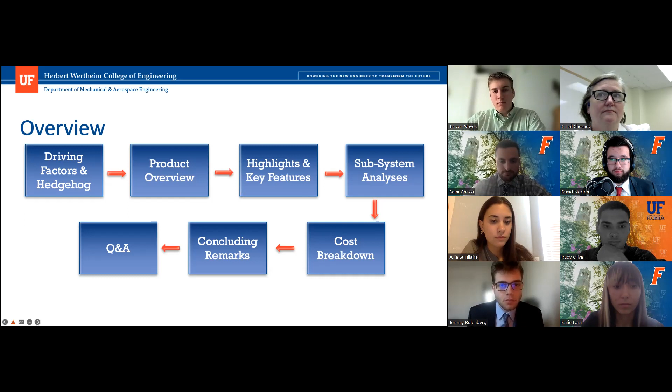One of the first steps that the HelioGEAR team took to converge on a final conceptual design was developing a hedgehog concept. To do this, we had to examine 3 important questions: firstly, what our team was best at; secondly, what our team was passionate about; and thirdly, what drove our economic engine.

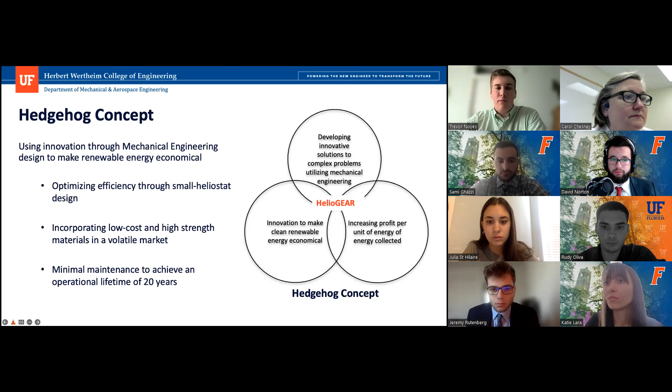After some careful deliberation, we determined that our team was best at combining our mechanical engineering skill sets to solve complex problems using innovative solutions within the field of mechanical engineering. Secondly, we determined that our passion lies within using the innovative solutions we developed to make clean, renewable energy economical.

Finally, we needed to figure out how to make what we were good at and passionate about unique and profitable for our customer. Our goal was to increase the profit margin per unit of energy collected by our heliostat module. To accomplish this, we aimed for a strong, low-cost design that had minimal tracking error to reflect more of the collected light onto the receiving target.

With the ever-changing status of the world market, it allowed us the ability to utilize unconventional, low-cost, and high-strength materials to keep the overall module cost down. To further increase the efficiency of the design, the HelioGEAR team aimed to create a design that required minimal maintenance for the full 20-year service lifespan of the module. Conceptualizing these thoughts in a diagram, we find the HelioGEAR module right at the very center.

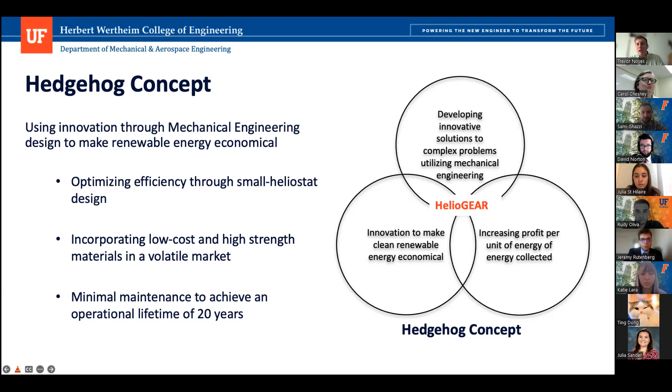Lastly, the electronics will be composed of an ESP32 chip for Wi-Fi and Bluetooth connection, while also looking at having a limit switch that will be attached to the PVC pipe to alert the system when the mirror is not at its home position.

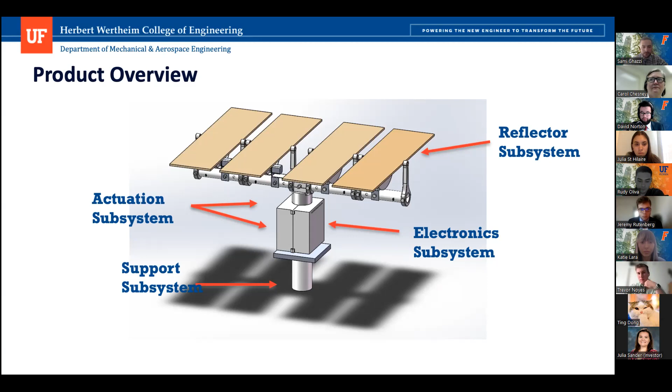Next, based off of the product overview, some of the highlights and key features taken away were the PVC support system, the geared actuation mechanism, and utilizing the mylar for the coated surface on the mirrors. The PVC support allows us to achieve a very lightweight, rigid, and long-lasting structure for a minimal cost.

Moving on to the geared actuation mechanism: utilizing gear sets that are very specific to our concept allows for extremely precise tracking of the sun and results in minimal loss of reflected sunlight. And finally, the Mylar film coated surface creates a much stronger, more durable mirror for even less cost than one would think for a conventional glass mirror.

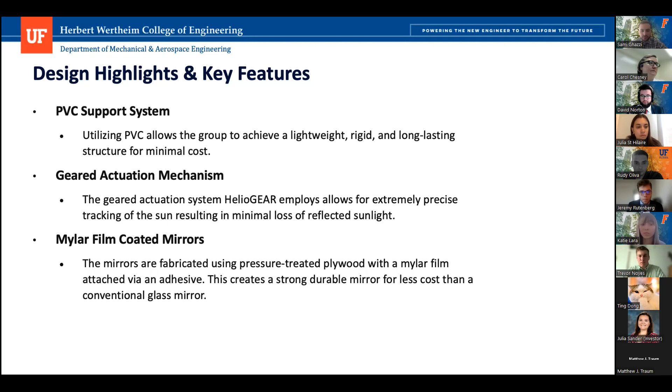And now we'll take a look at the actuation subsystem. I'd like to wish our guests a warm welcome. Good morning, so this is our actuation system.

So we have 5 individual motors that will be controlling our system in 2 dimensions. We have a large azimuthal motor that has 17 foot-pounds of torque, and 4 vertical stepper motors, each with 0.35 pounds of torque.

In order to control the surfaces, we're using different geared systems. The azimuthal motor is very high in torque and uses a relatively smaller gear than the vertical motors, because as we'll see in a moment, the vertical motors use very large ring gears, and the azimuthal motor, because of geometric constraints, uses a slightly smaller ring gear. So the azimuthal control is done with a single motor, and this is energy efficient and allows all 4 mirrors to rotate in the horizontal plane at once.

Each mirror can be rotated in the vertical dimension on its own. If we could see the next slide, please.

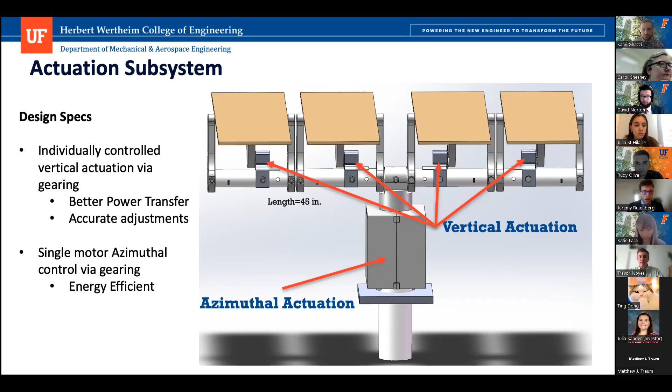Now, as you probably noticed from the last slide, it is a bit T-shaped, so that requires a lot of torque to be able to rotate the entire system at once. Next slide, please.

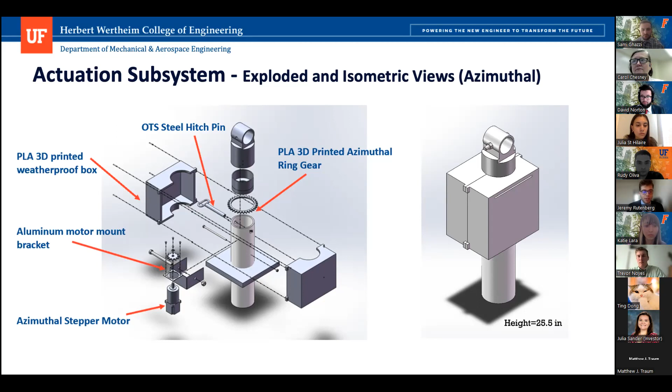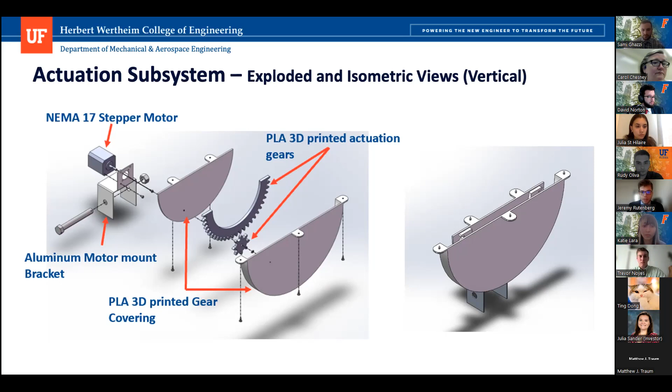The 4 major customer needs for the actuation subsystem were found to be: first, each module needs to mitigate optical losses due to tracking errors not to exceed 40%. With our geared actuation design, we are able to control very precise movements of the heliostat, so we have 0 tracking error.

Next, the heliostat must be capable of tracking the sun throughout the day. In order to do so, there needs to be at least 2 degrees of freedom, and thus in our concept, HelioGEAR rotates both azimuthally and vertically to get those 2 degrees of freedom.

Next, capable of redirecting sunlight to a central tower up to 100 meters tall. We found that the vertical rotational movement must be greater than at least 90 degrees, and with our design we have a vertical rotation movement of a minimum 180 degrees.

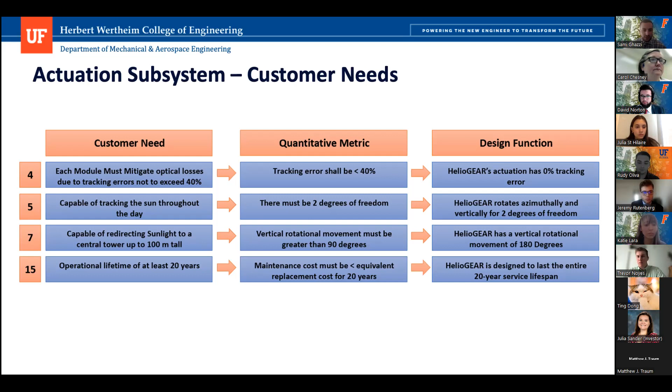Next, the operational lifetime of at least 20 years. Our design is designed to last the entire 20-year service lifespan while looking at all of the factors of use in Las Vegas, Nevada under certain extreme conditions.

Furthermore, we have some critical analyses of the actuation subsystem. On the left, we have tracking error, and obviously tracking error is a very important aspect of this design. Initially we looked at many different factors that would go into tracking error and specifics to Las Vegas, Nevada.

We look at some boundary conditions, such as where will the sun be in the most extreme cases, such as early in the morning, late in the evening, and during the winter solstice. That was when we determined the sun would be lowest during operating conditions. For this analysis, we assumed the sun would be moving 180 degrees across the sky over 12 hours for simplicity and general accuracy, yielding an angular rate of 0.25 degrees per minute.

Using that, we can plot the optical gain against the angle of incidence between the sun and the actuator. The optical gain of the system is 50%, and the optical losses due to tracking are 50%. This doesn't meet the threshold the customer requires of 40%.

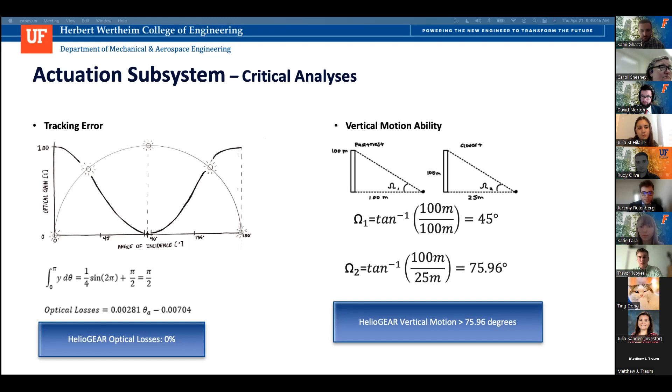Initially, we designed this backing to be made out of injection molded ABS plastic, but with a cost of nearly $300 per module, this was ruled out as being far too expensive. The mylar film will be attached to the wooden support through the use of a spray adhesive.

The mirrors are actuated by stepper motors connected through a gear track at a reduction ratio of 6.5 to 1. This really tall gear ratio allows for the tracking to be very accurate. For each step of the motors, the mirrors actually only shift 0.3 of a degree.

Initially, the gears were going to be exposed and machined out of aluminum. However, through several design changes and attempts to save costs, the gears were changed to be 3D printed out of PLA. As a result, it became a concern that sand and other debris could become trapped in between the gear teeth and over time wear down the plastic and cause the gear system to become loose, reducing the accuracy of the tracking. To fix this potential problem, gear covers, also 3D printed out of PLA, were designed to fit snugly over the gears to minimize the sand and other debris that gets in between the gear and the gear tracks.

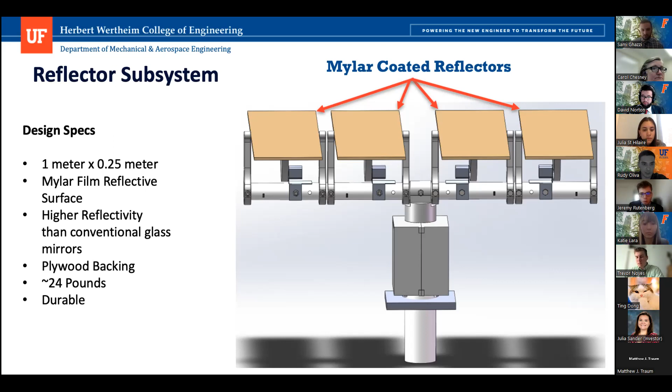On the next slide. So this next slide shows how the subsystem is assembled. The gear track is aligned with the longitudinal axis of the wooden mirror support, and it's fixed in place so that it's concentric with the axis of rotation of the mirror support.

While the hinge rods do not rigidly attach to the wooden support, they are fixed in place on the crossbar and keep the mirror in place from sliding off of the ends of it. After the heliostat has been fully assembled with the elevation motors in place, the gear covers are added by aligning them with the gears and using self-tappers to fix them to the mirror support.

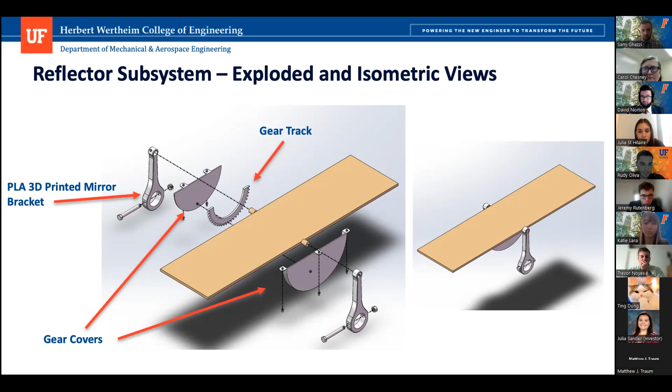This next slide is in regards to HelioGEAR's reflector subsystem customer needs. Based on the customer needs statement that we received from the proposal, we determined that many of the customer needs did in fact relate to the reflector subsystem, making it one of the most important subsystems.

Beginning at the top, customer need 1 asked us to address innovation by small heliostat size. This was a metric that was hard to define quantitatively. However, the way we chose to do it was by essentially taking the highest average from the combined module cost, shading, and focal inputs from our conceptual designs. We combined all of those together to create the best functional design to allow the heliostat to be innovative by small size. Secondly, the total reflector collection area had to be equal to or less than 1 square meter.

HelioGEAR is able to fulfill this design need by utilizing a mirror system that has 4 quarter-square-meter mirrors to add up to a total of 1 square meter of reflective surface area. Third, each module needed to be composed of 4 to 16 heliostats. Our final reflector subsystem utilizes exactly 4 individually controlled heliostats.

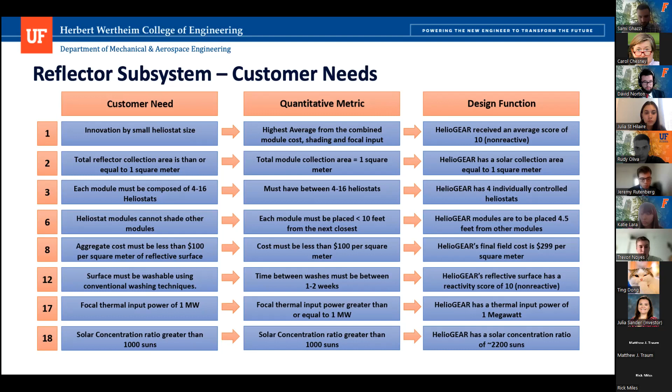Explaining this further, the customer needs statement called for a heliostat module to be presented that was able to deliver at least 1 megawatt of thermal input power and have a concentration ratio greater than 1,000 suns. The HelioGEAR module is able to meet these needs.

The analysis begins by writing out the heat transfer energy balance equation and deriving the necessary variables used in the calculation. We determine the total heat flux the heliostat transmits to the receiving tower is the summation of the total heat flux reflected by the field minus the heat flux out of the system, essentially the losses due to radiation and scattering from the reflective surface.

The heat flux out of the system is composed of the Stefan-Boltzmann constant, the temperature of the receiver—which we determined to be the average high temperature throughout the entire year, 26.9 degrees Celsius—and the area of the target receiver.

The heat flux into the system from the reflectors is composed of the optical efficiency of Mylar, which we determined was 90%—essentially 90% of light reflected off is further transmitted. This is multiplied by the total number of modules in the field, further multiplied by the radiative heat flux received from the sun and the reflective area of the heliostat module.

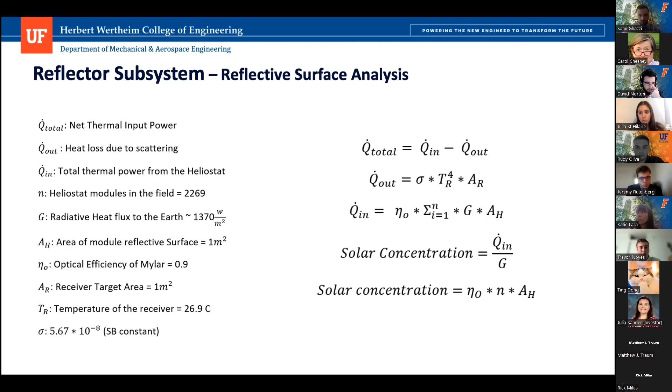The solar concentration ratio can then be determined using the heat flux into the system divided by the radiative heat flux from the sun. The next slide shows the completion of the calculations.

Completing the calculations gives us a heat flux out, essentially our losses, of 459.57 watts. However, the heat flux coming into the system due to the reflectivity of the mirrors bouncing back to the receiver is 2.79 megawatts, essentially 2.79 times 10 to the 6th power watts. Subtracting the losses still leaves a total thermal input of 2.79 megawatts, much greater than 1 megawatt, and a solar concentration ratio equivalent to about 2,040 suns.

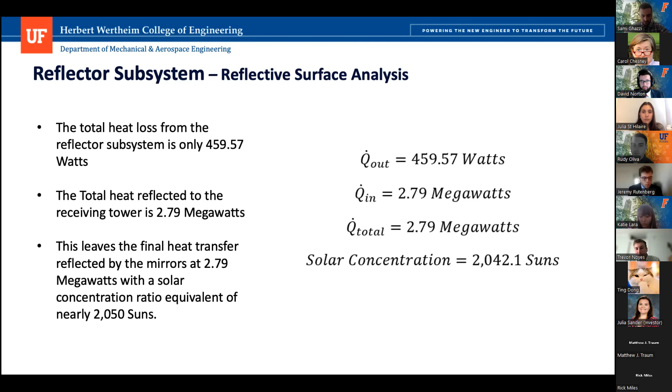Changing gears to the support subsystem, it is mainly composed of a vertical PVC support and a horizontal PVC support. The width of the entire module is 1.3 meters, the height to the axis of rotation is 0.82 meters, and the height to the top of the horizontal support is 0.64 meters.

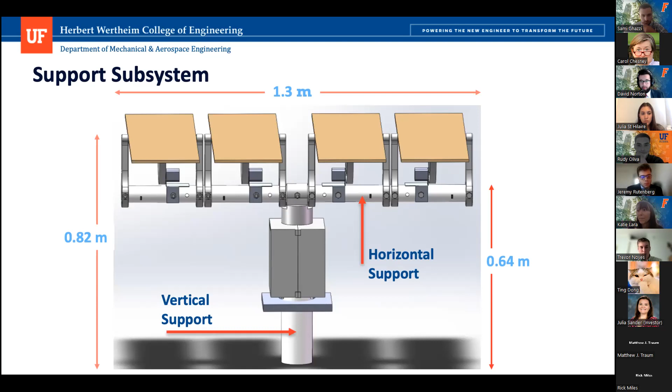Looking closer, a 2-inch PVC pipe slides into a 3D printed PLA rotator cuff and is held in place by a through bolt and nut. The cuff is press fitted into a 3D printed PLA cuff insert that is press fitted to the steel bearing. That assembly is then press fitted into a 3D printed PLA bearing collar and inserted into the 4-inch PVC main support pole. The main support pole is 9 inches above the ground, and below the ground, represented by the flat plate, is 9 more inches of the PVC main support pole that is driven into the ground.

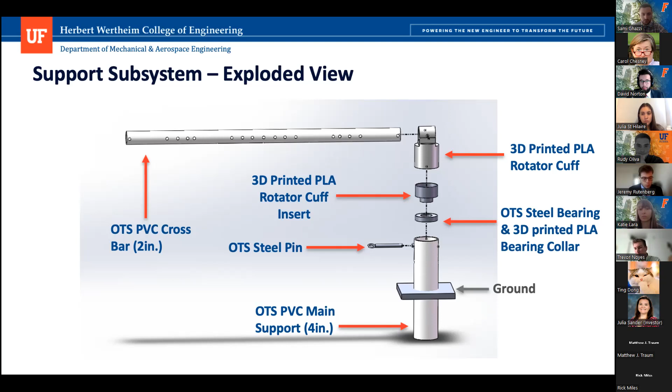As our team designed the support subsystem, we primarily focused on the customer needs shown here. First, the customer defined that the factor of safety for the heliostat must be greater than 2—the support subsystem must be able to withstand at least double the weight it is intended to hold. HelioGEAR not only met but exceeded this metric with a factor of safety of at least 3.75.

Next, to justify manufacturing parts, the customer also required that the cost of manufacturing be less than or equal to that of an equivalent off-the-shelf part. To satisfy this, each manufactured part on the support subsystem is 3D printed from PLA, a readily available and easily manufacturable material. The support subsystem is also composed of PVC and steel, both expected to withstand the desert-like conditions of Las Vegas, Nevada.

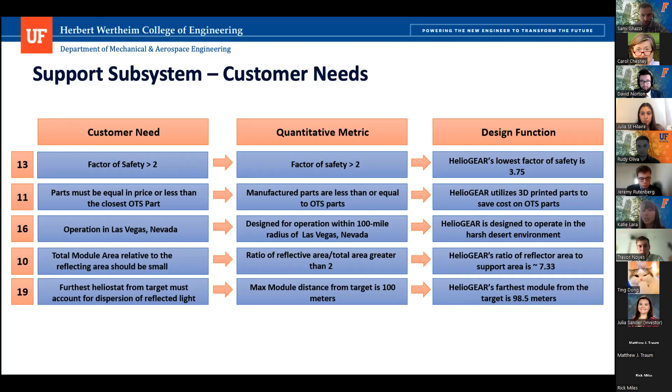Finally, the ratio of reflective area to non-reflective area of the support system is 7.3, and when oriented in a field of heliostats about a central tower, the support subsystem positions the reflectors such that the maximum distance between the receiving unit and the reflectors is 98.5 meters.

The bending stress on the 2-inch PVC crossbar was calculated. The crossbar was treated as a cantilever beam from the center pivot point to one end of the pipe. The other half of the crossbar was simply a mirror image of the cantilever beam, resulting in the same bending factor of safety calculation. Therefore, the cantilever beam supported only 2 of the 4 mirror systems.

The force from each mirror system was found to be 111 newtons. Using the bending stress calculation, the bending stress was found to be 10.1 megapascals. PVC has a tensile yielding strength of 37.9 megapascals, resulting in a bending factor of safety of 3.75.

The buckling factor of safety was calculated for the 4-inch PVC main support. The critical load was found to be 292 kilonewtons, and the applied load was only 467 newtons. So the buckling factor of safety was found to be 626.

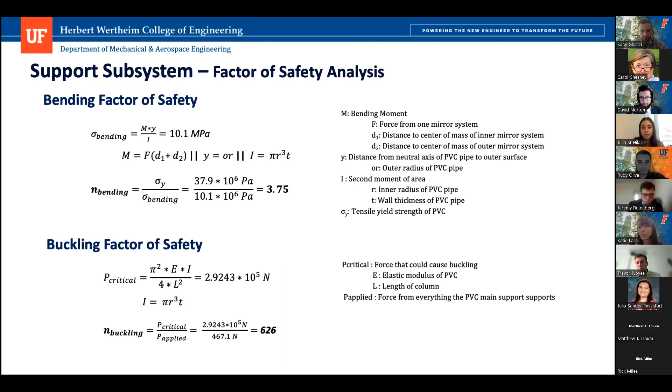The materials of each of the components in the support subsystem were also important in ensuring that the cost and longevity of the heliostat met the needs of the customer.

As mentioned previously, the customer specified it needed to withstand harsh conditions, and the rotator cuff insert and bearing collar all had very specific dimensional requirements that would have been difficult to purchase based off of the nominal sizing of off-the-shelf parts.

The decision to 3D print these components from PLA was due to their low cost. Additionally, when considering whether PVC, steel, and PLA were suitable for operation in Las Vegas, Nevada, we made sure to look up the highest recorded temperature in Las Vegas, which was found to be 118 degrees Fahrenheit, and each of these materials have a maximum operating temperature that is well above that.

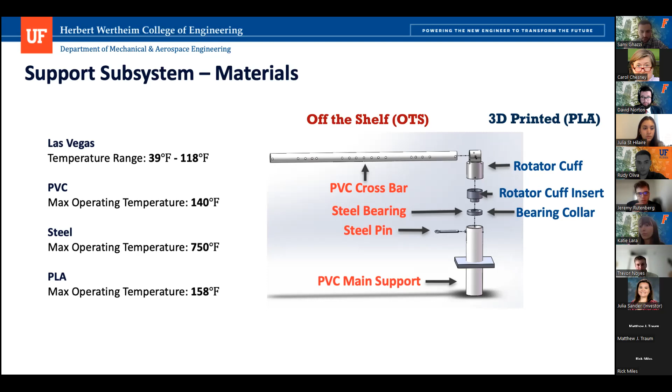Moving on to the electronic subsystem, we chose the ESP32 for the microcontroller. It has universal Wi-Fi and Bluetooth capabilities, and it is programmable. It has a sufficient operating temperature for Las Vegas and the proper voltage input for the field.

We also chose to use stepper motor drivers, more specifically the A4988 drivers. They had a good voltage range as well as many different step resolutions. These also had a sufficient operating temperature.

Lastly, we chose to use a snap action limit switch by the brand Omron. Unlike the other electronics, these will be placed on the outside of the PVC crossbar where the reflectors make contact with the bar. This will alert the actuation when the reflectors are fully vertical. It's also worth noting that we plan to use the stepper motors as another source of position management.

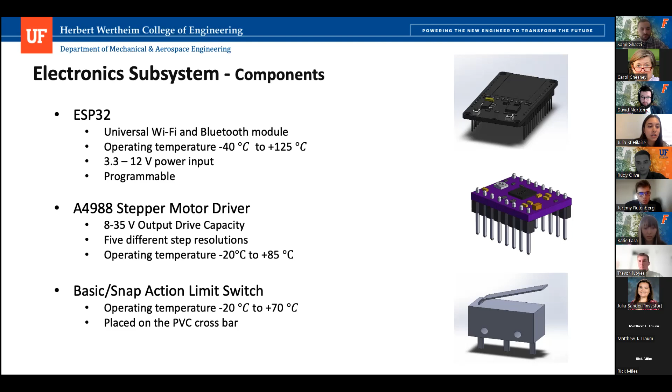In the bottom picture there, you can see the limit switch mounted to the PVC pipe where the reflector makes contact. The rest of the electronics will be placed inside an electronics box mounted onto the PVC main support. This box will be 3D printed and made of PLA plastic, so it will be water resistant. The box will hold the bipolar stepper motor, the ESP32, and the motor drivers.

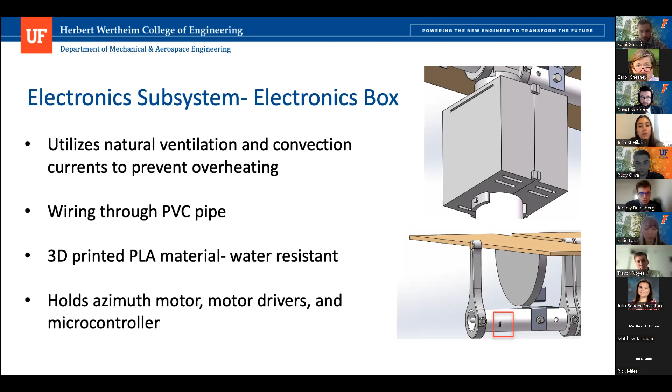In order to avoid overheating, we have built natural ventilation and convection currents into the box. We also made sure that the electronics could withstand temperatures well above the maximum temperature in Las Vegas, which was about 47 degrees Celsius, while the lowest electronic maximum temperature is about 70 degrees Celsius. Lastly, we plan to have the wires run through the PVC for further weather protection.

We only had one customer need for this subsystem: that tracking needed to be computer automated and controlled. We incorporated that into our design by making sure HelioGEAR utilizes the power generated at the field to power the modules. Also, we made sure that all electronics can run on a 12-volt power source.

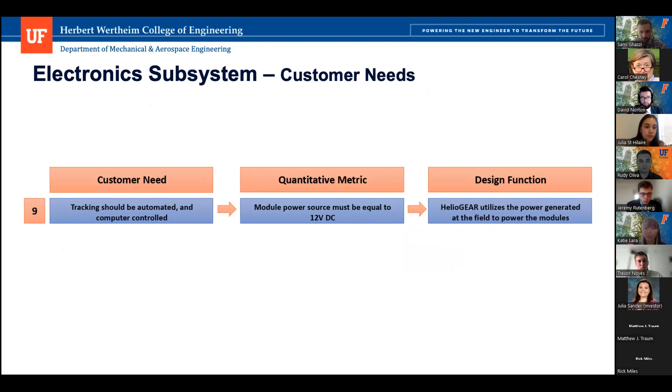In addition, some of the cost for a single prototype is wasted on things that can only be purchased in large quantities when only a few parts are actually needed. For example, some of the fasteners used in this design come in packs of 50 or 100 when we only needed 10 or 20 fasteners for a single prototype.

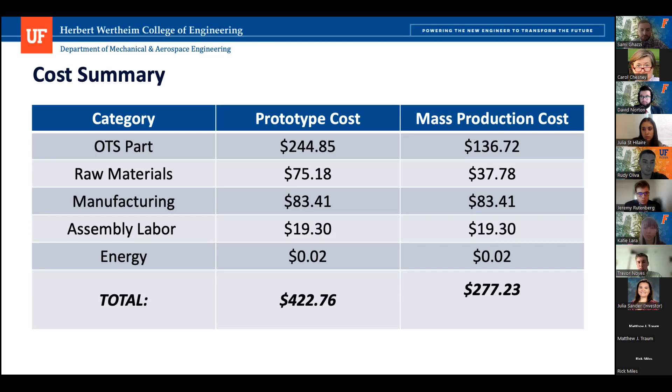So why do we believe that you should choose HelioGEAR?

We believe that our innovative design using unconventional materials allows for a less expensive heliostat module that achieves highly accurate solar tracking. The PVC support system offers a strong yet lightweight design with a high factor of safety. Furthermore, the 3D printed PLA gearing offers precise solar tracking at a fraction of the cost of metal gears. Finally, the Mylar film reflectors offer exceptional reflectivity in a durable package.

The HelioGEAR module is designed to have little to no maintenance associated with the design for the entire lifetime of the module. These features make the HelioGEAR solar module an innovative solution to make renewable energy more economical.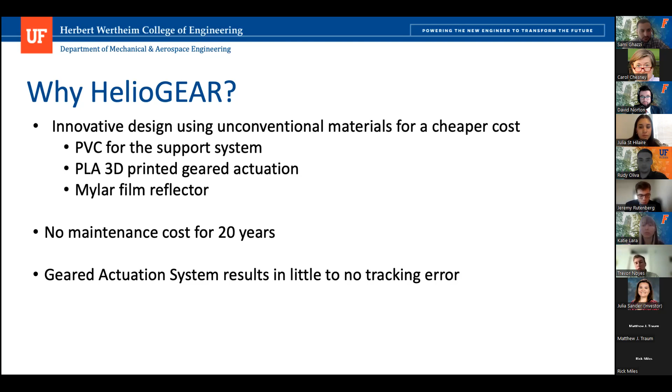In conclusion, HelioGEAR is a well-rounded design with an innovative approach to concentrated solar power. The main focus being the gear-powered actuation system and PVC support, with a total cost of $277 per module if mass-produced. That's it for our presentation.